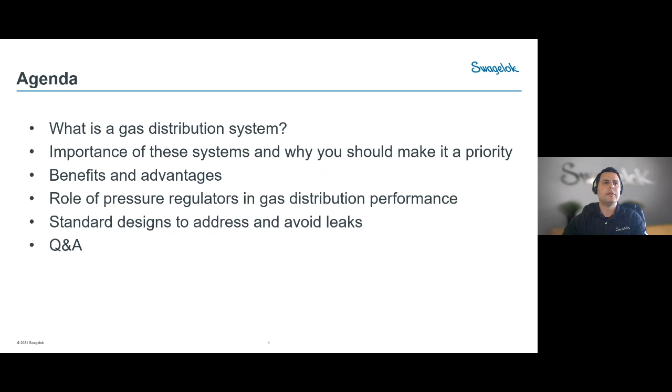So let's start by looking at what's a gas distribution system. These systems play crucial functions for many industries. They work to deliver gases from high pressure sources to the facility at the pressure and flow rate required by each of your applications. They are designed to provide precise and safe delivery of high pressure, toxic, corrosive, and flammable specialty gases in some cases. These gas distribution systems are crucial in many industrial applications where they need precise control of the pressure itself, and the control is either done at local storage units or in some cases at the point of use, like the lab, etc.

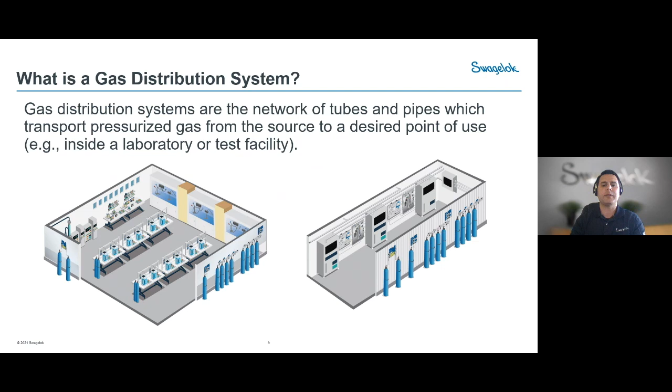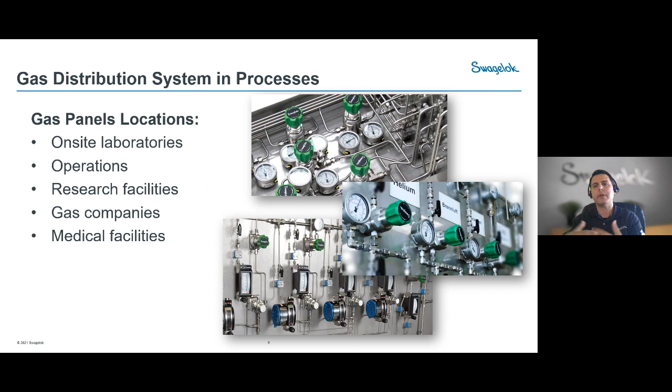There are multiple locations in industries where gas distribution systems are used. These systems play a series of critical functions within many industries, such as research facilities, lab operations, process, and production plants. For example, within chemical refining, analytical shelters analyze multiple process gases. They need to control the calibration gases such as nitrogen, helium, or hydrogen that might be used as carrier gases with a gas chromatograph or GC. So the purity of these carrier gases is critical. The gas sensors within analyzers can occasionally drift from the set specification, and the calibration gases play a critical role in restoring the accuracy of the detector through frequent and proper calibrations.

Gas distribution systems can play different functions and can be used for different purposes. Some customers may have a need to use gas panels based on the applications, the functions and needs. To list a few of these applications, they can be used as an access point for gas supply systems. They can also help maintain the purity and quality of the gas, and reduce the source pressure to a lower constant pressure desired by the application or system itself, enable an uninterrupted supply, handle reactive, toxic, and corrosive gases in some cases, and also proper handling of expensive gases, specifically for semiconductor applications or other crucial applications where you need to control precisely those measurements.

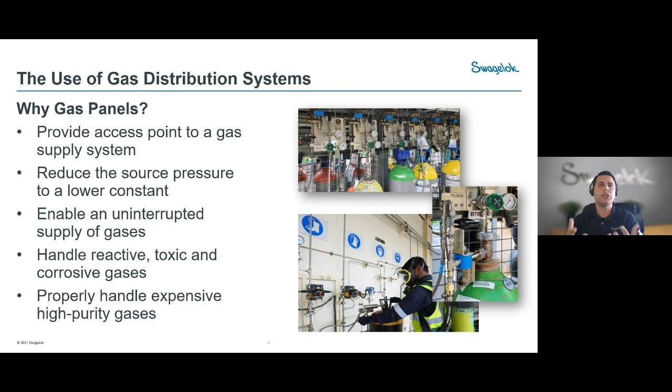Overlooked, we know that there are some issues with these systems that can result not only in the loss of gases, but also the loss of process efficiency, downtime, and ultimately, in some cases, the safety of the operator. So when system operation is not really intuitive, when leaks are a concern, or when your gas panels are difficult to service, that's where we think the time is needed to take actions to avoid these compounding costs. The one thing to keep in mind is that with any application or process, safely, reliably, and effectively delivering gases where they are needed provides the foundation of a well-performing operation.

There are some definite advantages that gas panels offer for any customers within their operations, applications, or industries.

First and foremost, it's safety. These systems need to ensure the safety and well-being of systems, but also the operators and all the team members. So when setting up a gas distribution system in a lab or any other type of facility, the safety of all personnel must be taken into consideration. These systems need to be designed to reduce the potential of gas leaks and maximize operator safety. They are critical and need to be assembled and tested prior to being placed in service. Additionally, these systems need to be designed and labeled to be both easy to understand and safe to use by the operator.

The second element is increasing uptime and process accuracy and repeatability. The design and quality of any gas distribution system helps ensure the reliability and uptime of any instrument. They need to allow and be easy to maintain and troubleshoot, keeping the system reliably delivering the pressure and flow required by each application.

The third element is focusing your time and resources where you need them most. These systems ideally need to be pre-configured, assembled, and tested. This helps limit the need for you to build these systems on site, allowing your specialists to focus their effort elsewhere. The reliability of these systems can also lead to a reduced need for maintenance, saving you additional time and resources.

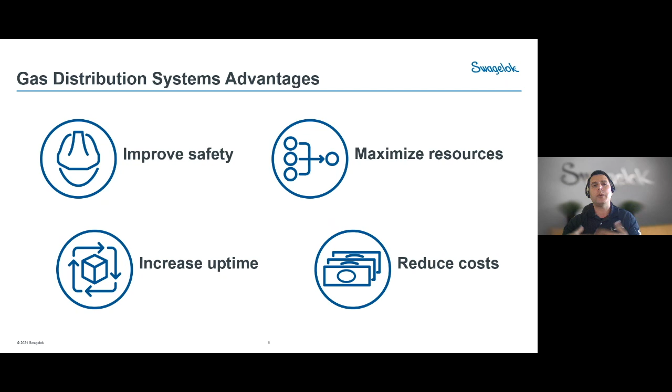In general, gas distribution systems are complex systems. If not designed and built properly, they can also have an impact on the end process and lead to consequences such as erroneous readings, inconsistent process results, system failures, etc. Not to ignore the challenges with gas leakage and wastage, which further amplify the unwanted losses that we just went over.

The fire triangle, sometimes referred to as the combustion triangle, is something that I know a few of you, if not all of you, have usually come across in school. This is what I consider a simple model for understanding the chemical reaction which may occur to create a fire in any gas system.

For example, let's look at an oxygen system. The primary hazards for oxygen are the high pressure cylinders, typically in the range of 2200 psi, and some at 3600 psi. Gas pressure systems are built from materials such as brass, copper, and in some cases stainless steel, with soft seal material like Teflon, etc. All of these are a form of what I call fuel in an oxygen environment. But its very composition in oxygen gas handling systems has two of the three required legs that you see in the triangle, namely oxygen and the fuel.

So the safety of the operators and your plant and facility will depend on our ability to control the heat or the ignition source within these systems. As such, these systems need to be designed with safety in mind by selecting the right material, using high purity or high quality components cleaned to certain standards, leak tight, and tested prior to installation to help ensure less time is needed to troubleshoot and ultimately improve the safety of the operators, but also the plant as a whole.

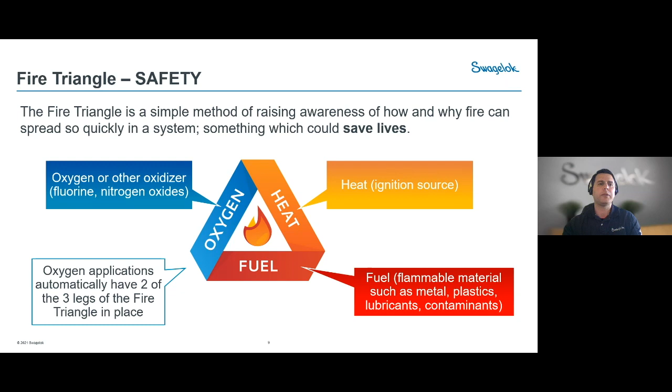First, you may ask why anyone would use 2 bottles or more. The simple answer is so you don't run out of the gas or media you're using in your application. When one bottle stops, you can switch to the other and get the empty one swapped or changed. Depending on your system, switching between the two bottles can be done either manually or automatically using a changeover system. These systems are designed to provide a continuous supply of gas from two or more source containers. Let's take a closer look at these systems and understand the pros and cons and how they function.

With a manual changeover system, operators need to manually reset the system when the first bottle is empty. The changeover has a lever which must be set to the bottle in use. It requires more involvement from the operators, and you'll have more interruptions to your process when a bottle is empty and needs to be changed. Maintenance is always needed here, and interaction with the operator and the system needs to happen constantly.

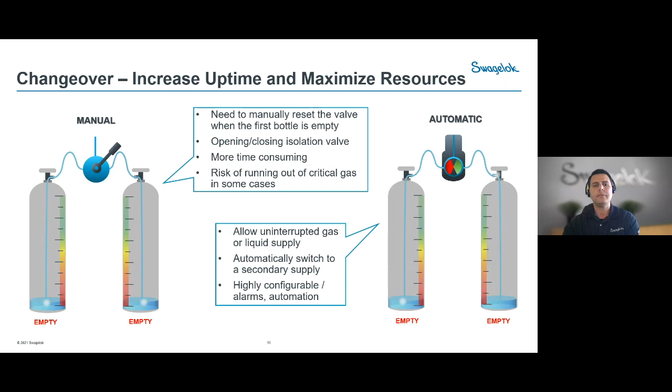Lastly, we know there is an increase in use of all types of gases, mainly driven by process requirements for manufacturing processes. But in order to achieve and maintain system integrity and performance, the selection of appropriate filters is absolutely essential.

As we know, the main source of particles are industrial gas components used within these systems, such as check valves, thread connections, ball valves, tanks, pumps, and in some cases the environment where these systems are installed. Though crucial to the process, these components may release particles flowing inside an installation. So to mitigate those risks, we need to install a filter to help capture those particles.

But the big question is, how do you choose the right filter? When dealing with filters, we know there's a variety of options out there, but there are some basic criteria we need to pay attention to when choosing a filter suited for your application, such as the filter component—or element—the size, and the material of construction for both the element and the housing. We need to keep in mind that the selection of the filter needs to match the task at hand.

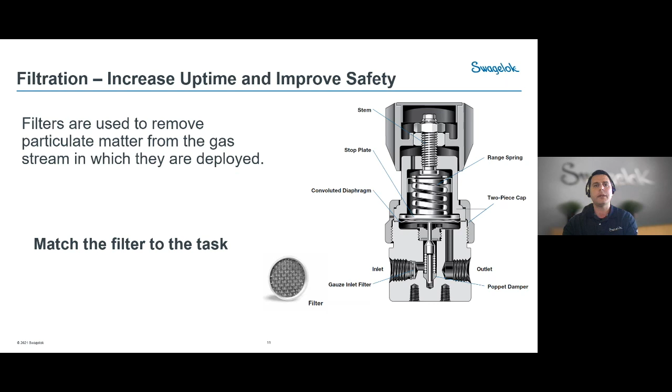So let's take a look at some of the fundamentals of gas distribution systems, and specifically a key element or product in these systems.

Regulators come in all shapes and sizes, but there are a few terms and definitions that we feel are important to understand and look at closely when dealing with regulators. A regulator plays a crucial role in these systems, and is kind of the shining star within these systems, and they are not easy to define or describe in one sentence.

But the key word that we need to keep in mind is pressure. A pressure regulator is a mechanical device designed to control the system pressure in response to an upstream or downstream pressure change. Regulators are used for gas and liquid and can be integral devices with pressure settings, a restrictor, and a sensor all in one body, or consist of a separate pressure sensor, controller, and flow valve.

Something to keep in mind when dealing with regulators is that there are two types. Downstream pressure changes are controlled by what we call a pressure reducing regulator, which will act as a control valve that reduces the input pressure of a fluid or gas to a desired value at its output. Upstream pressure changes are controlled by what we call a back pressure regulator, which is another control valve that maintains the set pressure at its inlet side by opening the flow, or allowing the flow, when the inlet pressure exceeds the set value.

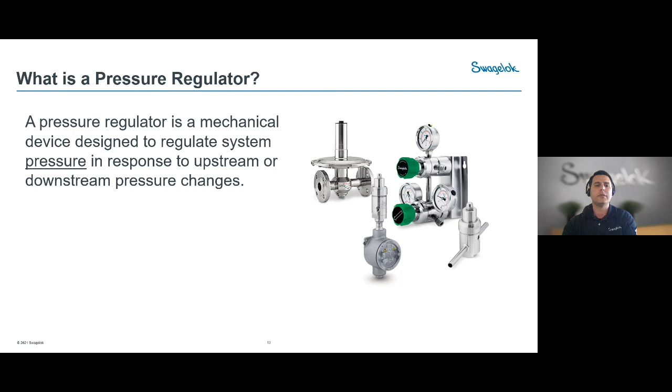When dealing with gas panels, we need to correctly size and select a pressure regulator because it's a critical component of a properly functioning gas distribution system. Every gas regulator has a flow curve that describes its operation range. The flow curve is important to look at, and it helps us determine the useful regulating capacity of that regulator, and mainly they have three sections.

The first section, which is the seat load or lockup, indicates the pressure above the set point required to completely shut the regulator valve and prevent the gas flow. When too much pressure builds up, the regulator kind of closes that pocket that it has within its body.

The second one, which is the ideal operating range for the regulator or for that system, is the area below the flow curve, where the regulator provides the greatest control range.

And lastly, the choked flow, which is a limiting condition where any reduction in downstream pressure will have no effect on the flow rate for a fixed upstream pressure. In this case, the regulator's valve is fully open and is no longer regulating the pressure, and it is acting more like a valve that just basically lets the flow go through.

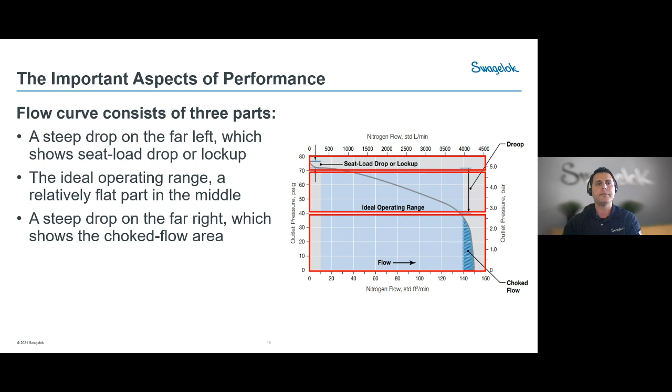Now that we understand some of the design characteristics along with some of the decision factors, let's take a close look at our standard design and some of what Swagelok considers the best practices for gas distribution systems.

We have segmented our gas distribution systems into four main modular gas panels, making it easier to control the gases at the point of use when a gas source is located remotely, providing a practical way to regulate and control specialty gases at the process point or locations like a GC, for example, when gases are stored in remote locations.

These systems have been designed with safety in mind to reduce the potential of gas leaks, but also to protect operators, built with minimal thread connections to avoid leaks. Leaks can affect the performance of these systems, but also can have an impact on the process itself.

Intended to help maximize gas use and highly configurable, fully assembled and tested prior to delivery to ensure reliable performance, easy to maintain and troubleshoot. That's something we take pride in, and all our systems have taken into consideration how to make them as easy to operate from the operator standpoint, but also to maintain and service. Assembled using high quality products, designed and labeled for standardization to reduce training needed and make the operation safe and easy to understand.

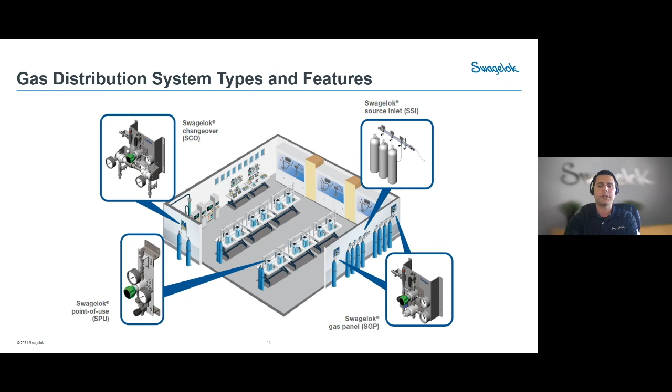So let's look at what we call a source inlet connection. These systems are intended for installations where there is a heavy use of gases or where extra control is needed prior to the primary gas control systems.

A source inlet is pretty basic, but plays a crucial role in helping manage your gas source. These systems typically include isolation, vent, and purge options. Additionally, these will typically be connected through a hose to the bottle, or hard tubing or pigtails to connect each bottle to this type of manifold.

A few additional benefits of these systems: the ability to isolate individual gas bottles entirely or the entire manifold to maximize safety. They are definitely configurable with bottle spacing to accommodate a wide range of bottle storage methods within your facility. There's also tagging capability where you can tag to identify which gas is connected to that bottle, or document service that has been done on those bottles or the system itself.

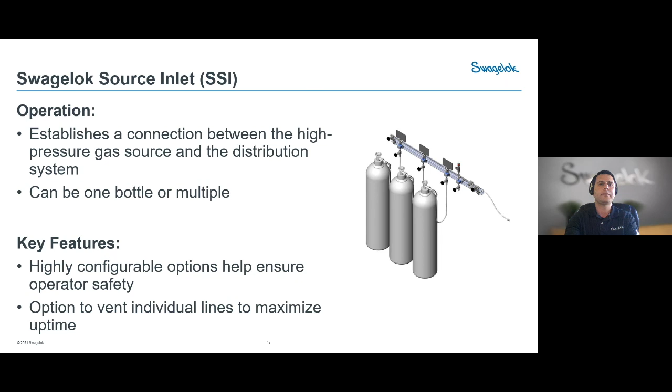The second one is the primary gas control systems, SGP. These systems are used predominantly to reduce gas pressure at or near the source prior to a larger gas distribution network, with many variations possible within a standard footprint. Each system can be configured to meet specific needs while being easily integrated into an overall installation. Being the first point of control, these primary gas control systems can be built with either single or dual stage pressure regulators to accurately deliver gas while minimizing supply pressure effect, providing ease of use dependent on each need.

Additionally, this system can be integrated with options such as vent, purge, and relief, incorporated to enhance the safety aspect we talked about. A few additional benefits: these systems are designed to be easily serviced and maintained, helping minimize downtime if maintenance is required. The upstream and downstream pressure indicators provide ways to confirm the system is performing as designed. Lastly, long service life, which is further improved when paired with one of the source inlets we just went through.

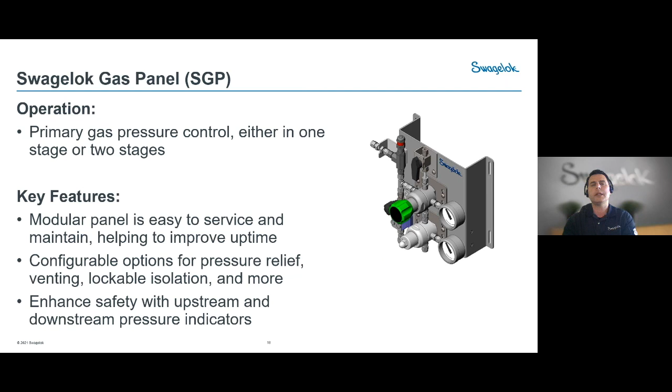The third one is the changeover system, which, as I mentioned earlier, provides continuous flow of gas and liquid to your applications. When the primary source is empty, these changeover systems are designed to automatically switch to the second supply. They eliminate pressure fluctuations, the outage of wasted gas, the outage of running out of gas, and also premature changeover. When one source is empty, the changeover will start drawing from the second source, and the first source can then be changed or replaced.

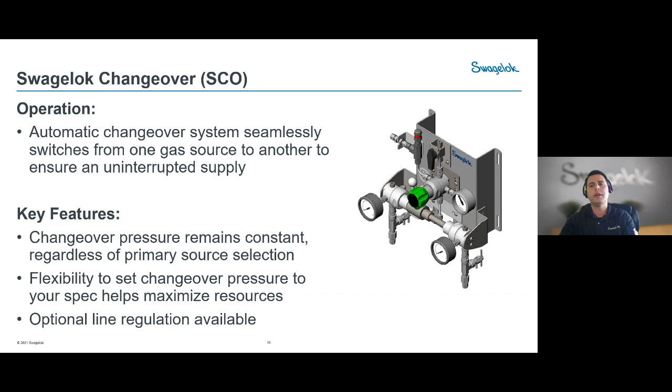These systems include high pressure inlet and vent valves, allowing for isolation and complete removal of any entrapped air after cylinder change out. Additional benefits: eliminate the cost of downtime by providing constant, uninterrupted flow; can be integrated with purge optimization; can be designed and offered for oxygen service as well. We have done quite a few of those for specialty gases where it's crucial to maintain the supply to your operations. Can also be integrated with pressure switch alarms, and can be fully automated to monitor the health and performance of the system.

The last one we have here for the systems overview is what we call point of use panels. These systems have been designed to provide a practical way to regulate and control gases at the process point or location of equipment. So when gas is stored in remote locations, they are intended to be the final control device in the gas distribution system. These systems can incorporate multiple products and features to help protect the integrity of lab gases, for example filters, which help protect the system and eliminate contamination, protect the lab equipment, and control multiple gases in a small footprint.

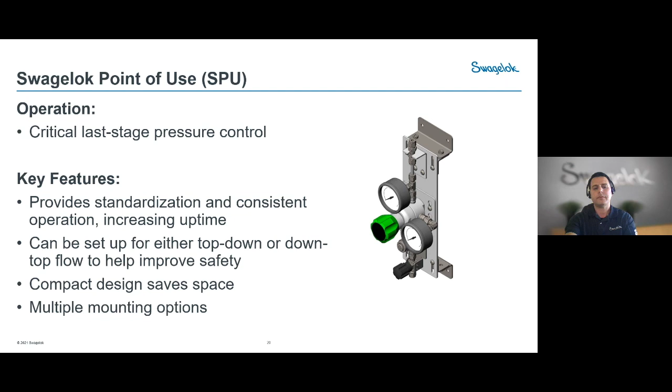So you might ask what type of documentation we provide with each of these systems. First and foremost, each system will come with a user manual. We need to make sure every component is properly identified and operators know exactly what to do when interacting with these systems, helping the operator and anyone who might have to service the panel with the information they need, where they need it.

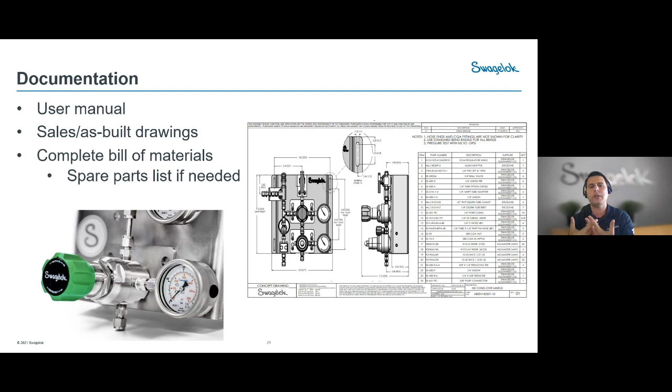Beyond that, we of course provide a sales drawing for each system along with a bill of material, and potentially we can also provide spare parts if needed—whatever you need to satisfy your needs in general. Overall, we are pretty flexible in terms of documentation, but at minimum, these are the types of things you should expect or receive with these systems.

Lastly, let's take a look at our part numbering structure, which is very unique to Swagelok. This is what I call a smart part numbering configurator that allows you to fully configure a gas distribution system for your applications. You can make your selections and design a specific system using this tool.

Once you have made your selections, if you have multiple locations regionally or even globally, you can rest assured that once you select that part number, it will be the same no matter what, whether you order it here in the US or in any other region.

Even if you have a need for any customizations, this is a great communication tool that you can use to work with our sales and service centers, where you can say, I need this. Minor changes, like change of the pressure gauge, the routing of the tubes, or some specific component, we can certainly accommodate. Or it can also be used as a tool to communicate major changes. You create a basic configuration, but you need a complete layout or change of the system's configuration.

This is a great tool to help communicate and interact with our sales and service center so they can support and understand better your need and provide you the ideal solutions for your applications.

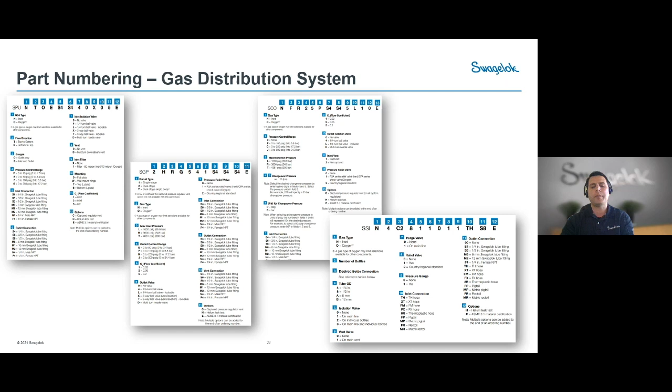Lastly, our team will design, assemble, and test the solution to your specific application or need, providing lasting performance. When systems are leak-tight, easily configurable, and ultimately reliable, you can maximize uptime and allow your team to focus on other priorities.

We have established a series of services to help you assess and look closely at your current existing systems and applications, where Swagelok and our sales and service center advisor will work with you to assess your current or future applications, which might include component analysis, on-site support, or even professional training with hands-on instructions, tailoring a solution that meets your business requirements.

So that will conclude our training. I'll be happy to take any questions that you might have.